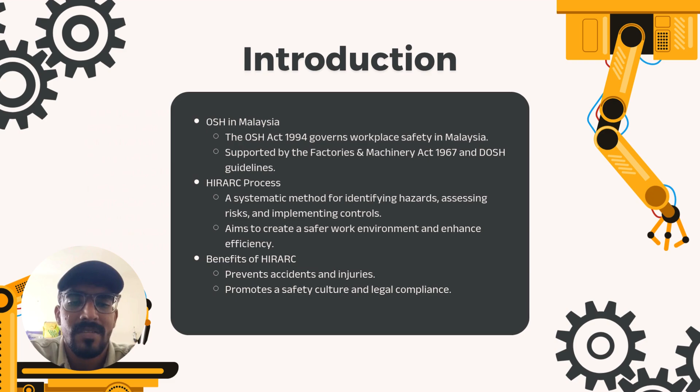Our case study was conducted at Bengkel Mesin Larik, which is located at TVET Center, Green Building at UniMAP. This workshop is used mainly for the mechanical engineering lab section where students carry out hands-on activities such as machining, drilling, cutting, and measuring. The workshop plays a key role in helping students apply what they learn in theory to real

equipment. The person in charge of the workshop is Mr. Mohammad Yusri bin Saad, who ensures that the lab runs safely and efficiently. The workshop supports all mechanical subjects with practical components and can accommodate up to 25 students per session.

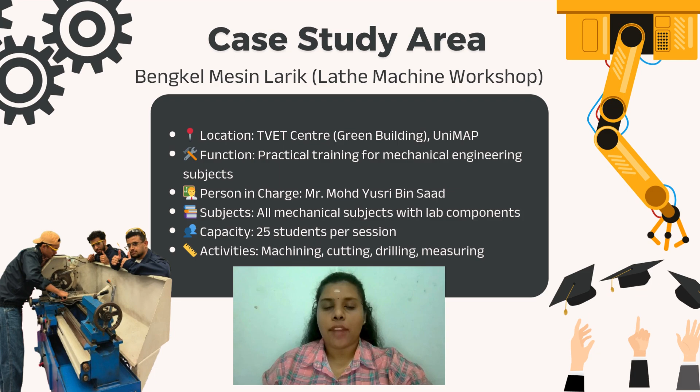Equipment and hazard classification. Asset 1. In this workshop, the main machines used are the lathe machine, bench grinder, drill press, and measurement tools like calipers and micrometers. We classified the work activities based on their risk levels.

High risk tasks include operating the lathe and grinder due to moving parts and sharp edges. Medium risk tasks include using sharp tools or lifting heavy items. And low risk tasks include measuring and cleaning, which still require awareness but pose less danger. This classification helps us to understand which activities need strict measures and close supervision.

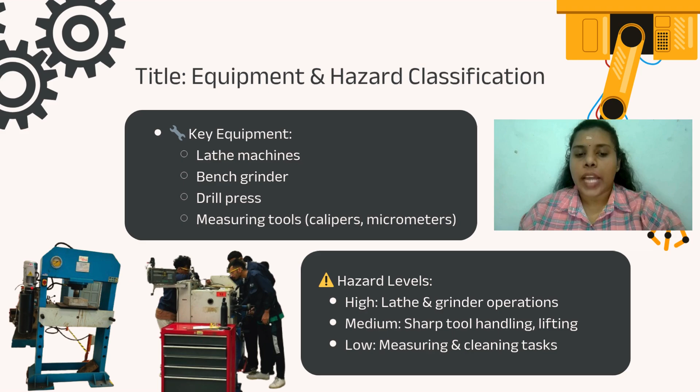Now, I will be presenting hazard 1, manual transferring of work materials. One of the hazards we identified during our case study at TVET Center is related to manual transferring of work materials. This happens when students lift and carry heavy or unstable tools and equipment by hand, especially through narrow

and cluttered walkways. This risk level is considered moderate because it can lead to cuts, sprains, or even fractures, especially if material is dropped due to poor grip or poor posture. To control these hazards, we recommend a few safety measures.

First, maintain clear and wide walkways to reduce tripping and falling. Second, use leather gloves to improve grip and protect hands from sharp edges. And finally, wear safety shoes to protect feet from dropped items. These measures may seem simple, but are often overlooked, especially when students are in a rush. That's why PPE, good housekeeping, and safety awareness are important during material handling.

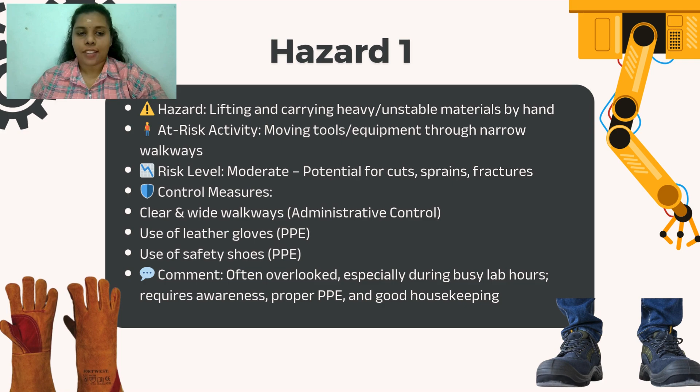Good morning, everyone. The second hazard identified in our case study is accidental contact with rotating parts on the lathe machine. This can happen when loose clothing, untied long hair, or jewelry gets caught in the spinning chuck, workpiece, or cutting tools. The risk level is high because this type of accident can lead to severe injuries such as entanglement

and even amputation. To control this hazard, we recommend using machine guards and emergency stop buttons as engineering controls. Administratively, strict supervision and proper enforcement of the dress code are essential. Students must be trained to tie their hair, remove jewelry, and fully understand the risk of rotating machines.

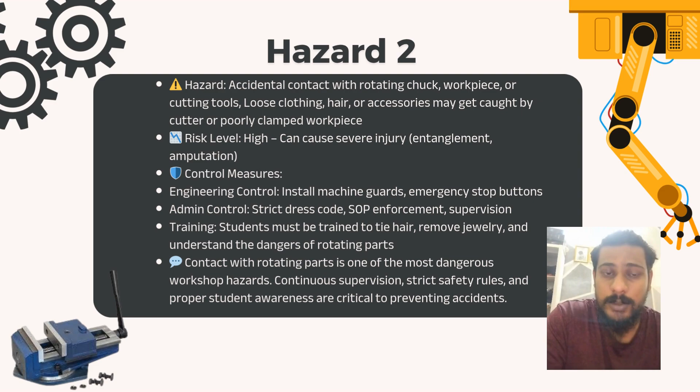This is one of the most dangerous hazards we can find in this workshop. Continuous supervision, strict safety rules, and student awareness are critical to prevent these accidents.

The third hazard identified is exposure to high noise level when multiple machines like lathe machines, grinders, and milling machines are running at the same time. Long-term exposure to loud noise can lead to hearing loss, stress, and poor communication in the workshop. The risk level is moderate to high, especially during busy lab sessions without proper hearing protection.

To control this hazard, we can install noise absorbing panels and regularly maintain the machines. We can also schedule machine use to reduce simultaneous noise and monitor the noise levels regularly. Students must be trained to understand noise risk and must always wear hearing protection like earplugs or earmuffs. Noise is often ignored but can cause serious health problems in the long term. Using hearing protection and smart scheduling can help us to reduce this hazard effectively.

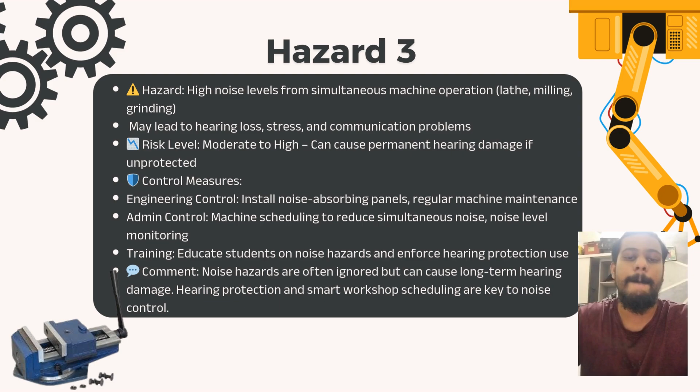Now I would like to present about hazard 4 and hazard 5 that we identified during our lab observation. Starting with hazard 4, improper setup of the cutter or workpiece. This hazard happens when the cutter is not fixed properly or when the workpiece is loosely clamped before operation. If the setup is wrong, it can lead to serious consequences such as vibration, tool breakage, or even flying debris, which can cause injuries to the operator's hands, face, or eyes, or to anyone nearby.

We assess this as a high risk hazard because the injuries can be serious if the machine runs with a poor setup. To reduce this risk, we propose the following control measures. First one, engineering control. Make sure all tools and materials are securely fixed before using the machine. The second one is administrative control. Lab technicians should always supervise students during machine setup and ensure that SOPs are strictly followed.

The third one is training. All students should be trained on how to check the cutter and workpiece properly before use. In summary, small mistakes during setup can lead to big accidents. So proper setup, supervision, and training are key to avoiding this hazard.

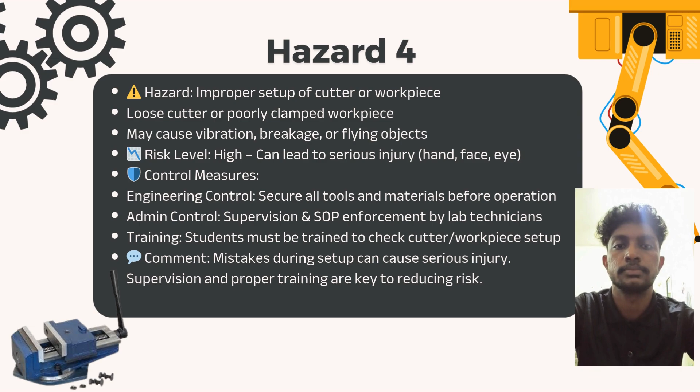Now, moving on to hazard 5, cleaning metal scraps after machining. After using the machine, sharp metal debris is often left behind. Some students try to clean it using bare hands or just a cloth, which is unsafe. These sharp edges can easily cause cuts or puncture wounds, especially if the cleaning is rushed. We classify this as a moderate risk. While the injuries may not be serious, they are very common and easily preventable with the right practices.

To manage this hazard, the control measures are administrative control. Students should be instructed to clean using the correct tools like a brush or broom, not their hands. And students must wear protective gloves when cleaning around sharp metal scraps. Even though this task may seem small, it still carries risk. That's why good cleaning habits and awareness are important to maintain lab safety.

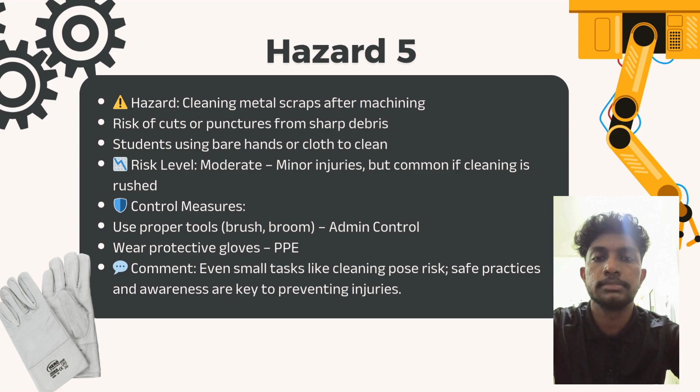Okay, now let's take a closer look at the machining workshop. In our case study, we identified high, medium, and low risk activities. High risk activities like operating lathe machines and grinders, medium risk activities such as material handling and cleaning, and low risk activities such as measuring instruments. We also assessed the risk associated with these activities and established control measures. Engineering controls like machine guards, administrative controls like safety training, and PPE such as gloves and safety shoes are crucial to mitigate these risks. This process not only protects workers but also encourages a culture of safety within the workshop.

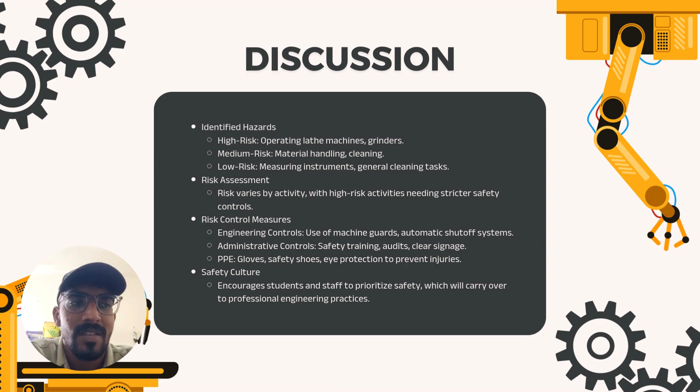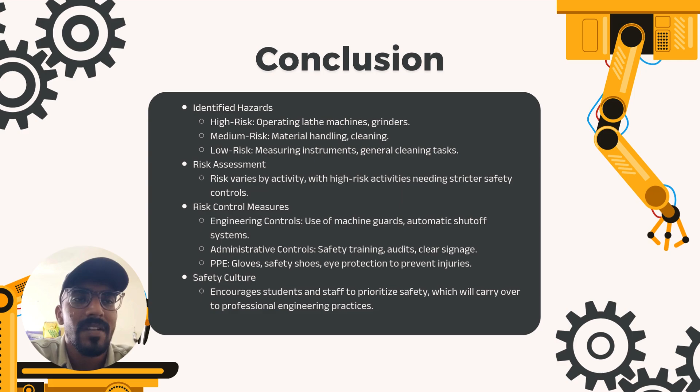In conclusion, the HIRARC process is vital in identifying and controlling hazards to ensure worker safety. It prevents accidents and promotes a safety conscious environment. The safety culture is carried forward into the professional careers of future engineers, ensuring compliance with safety standards. By implementing these measures, we create a safer, more responsible industry for the future.